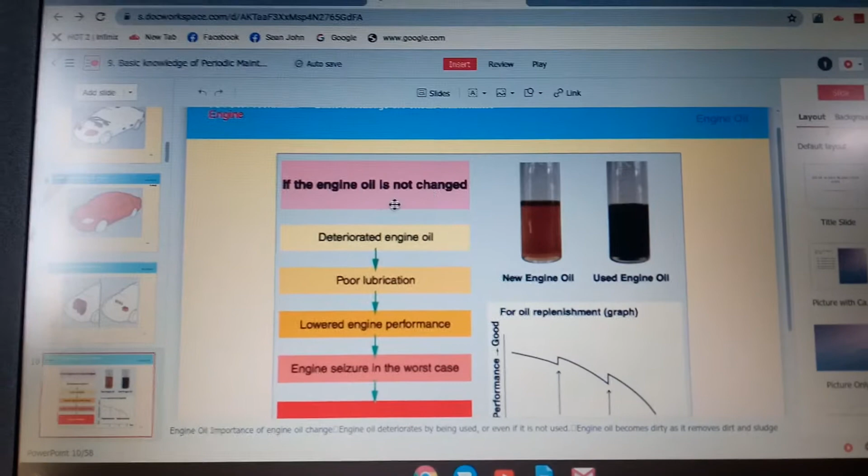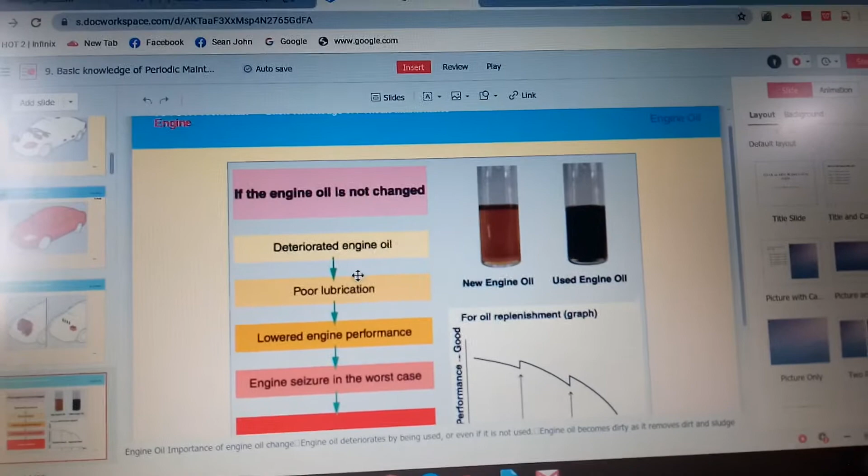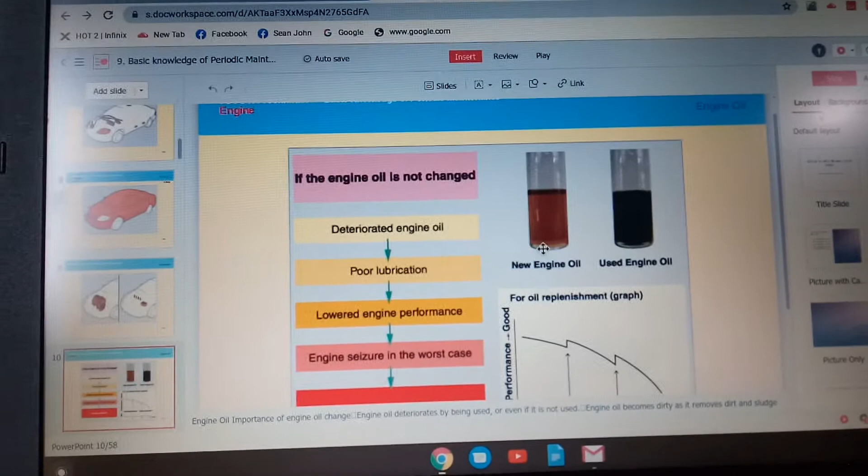This is the engine. You can see the engine oil is not changed. If the engine oil is not changed, the oil deteriorates, causing poor lubrication and lowered engine performance, and in the worst case the engine seizes, requiring new engine oil. Look at how clean new engine oil is compared to used engine oil, which is very dirty.

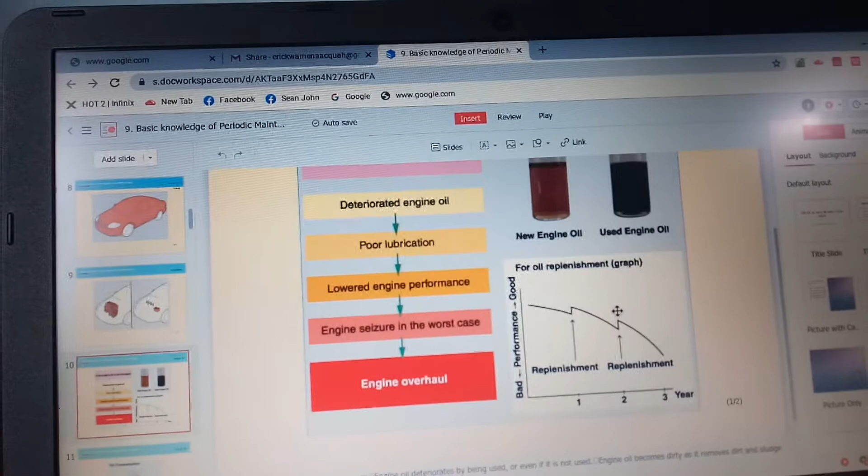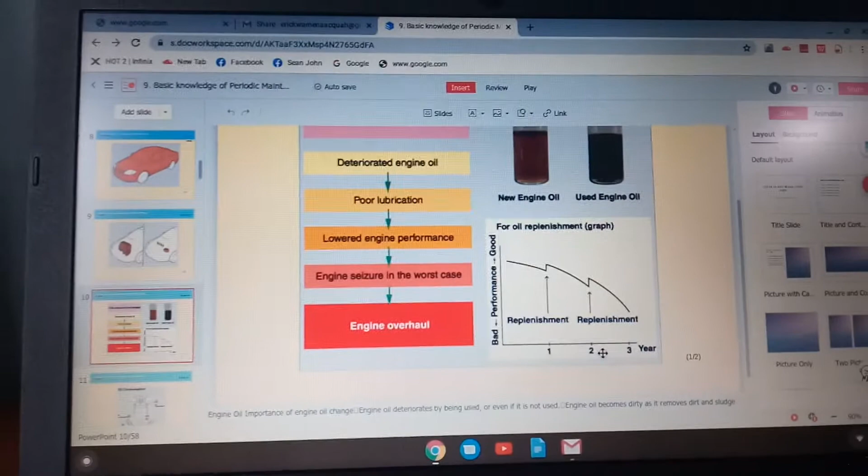For the oil replenishment graph, yes, this is the replenishment graph - engine overhaul replacement. For the oil replenishment graph, it's recommended. First year, second year, and then the third year. So there we are.

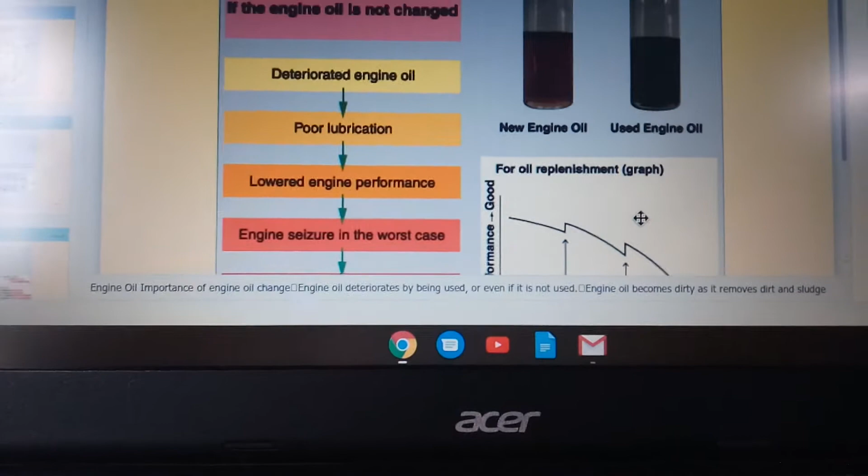Oil - the importance of engine oil. Engine oil deteriorates by use, or even if it is not used. Engine oil becomes dirty as it removes dirt and sludge.

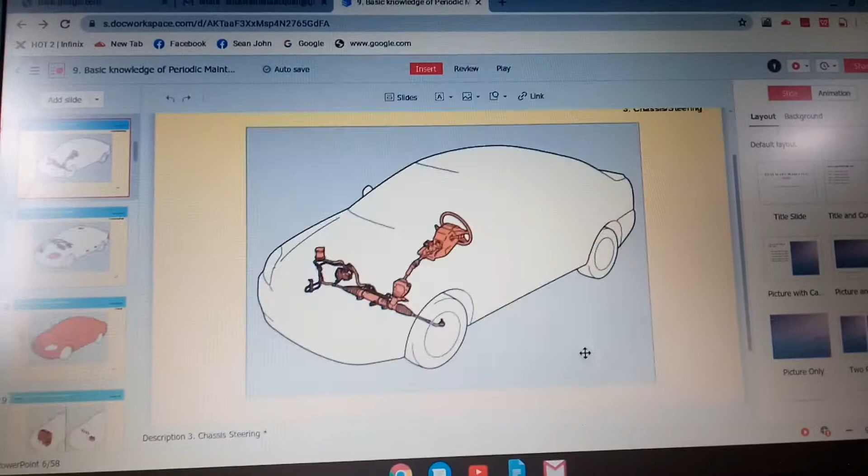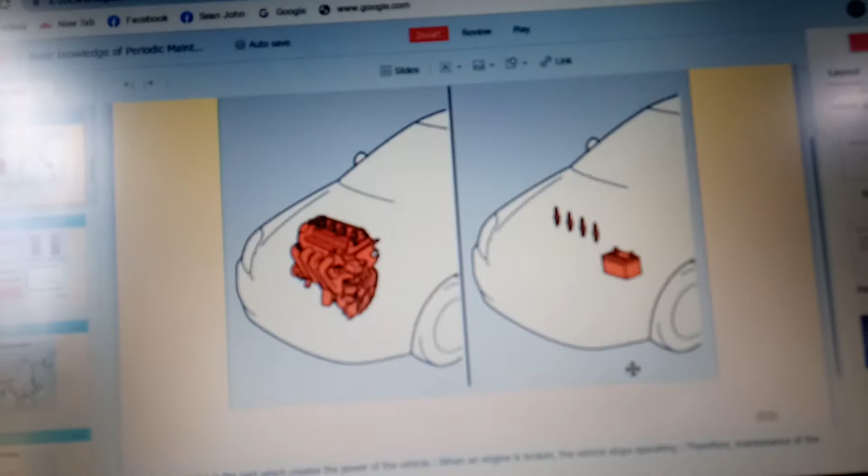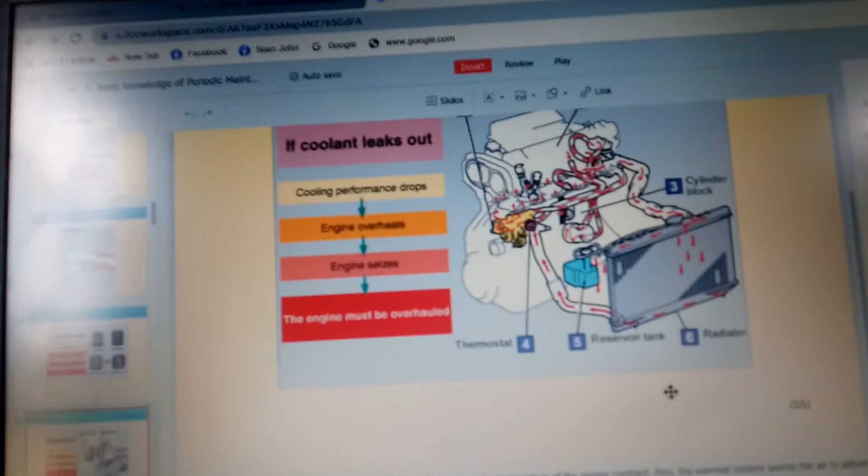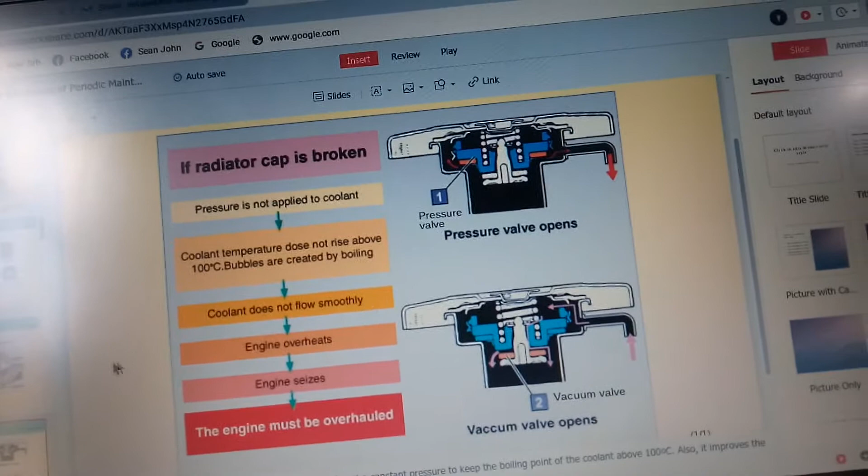Okay, the radiator cap is broken. The pressure - see, pressure is not applied to the coolant. Coolant temperature does not rise above 100 degrees Celsius. Bubbles are created by boiling. Coolant does not flow smoothly. The engine overheats and seizes. The engine must be overhauled.

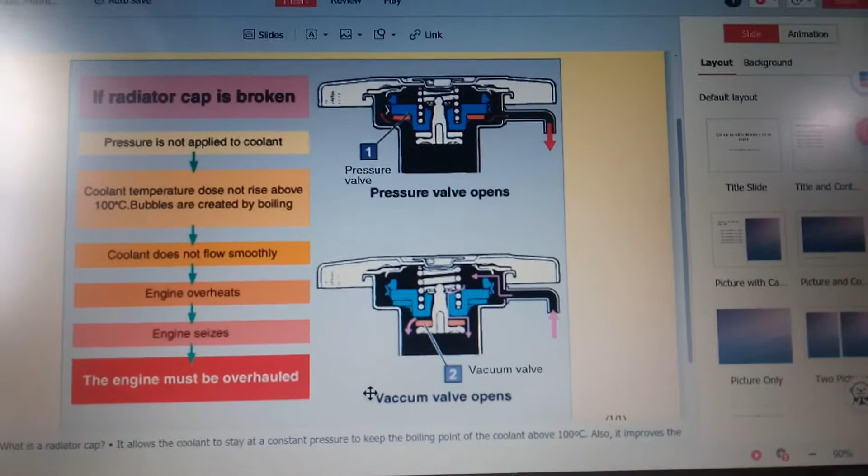The pressure valve opens, then you see the vacuum valve opens. What is a radiator cap? Radiator caps allow coolant to stay at constant pressure to keep the boiling point of the coolant above 100 degrees Celsius. Also, it improves...

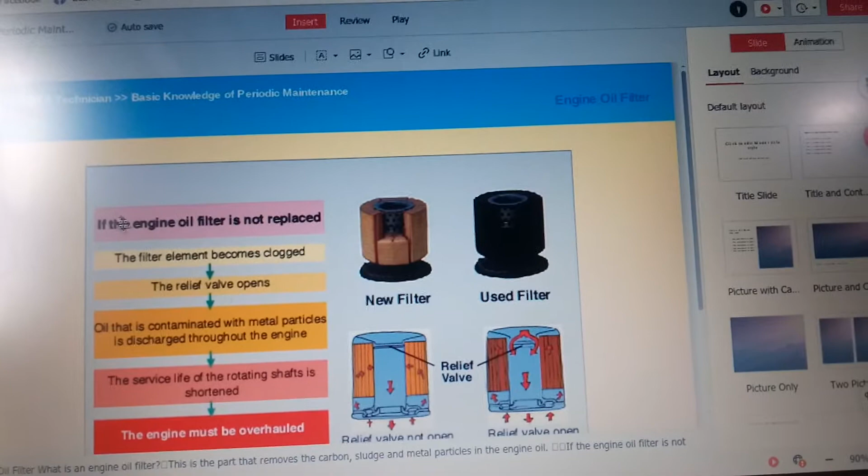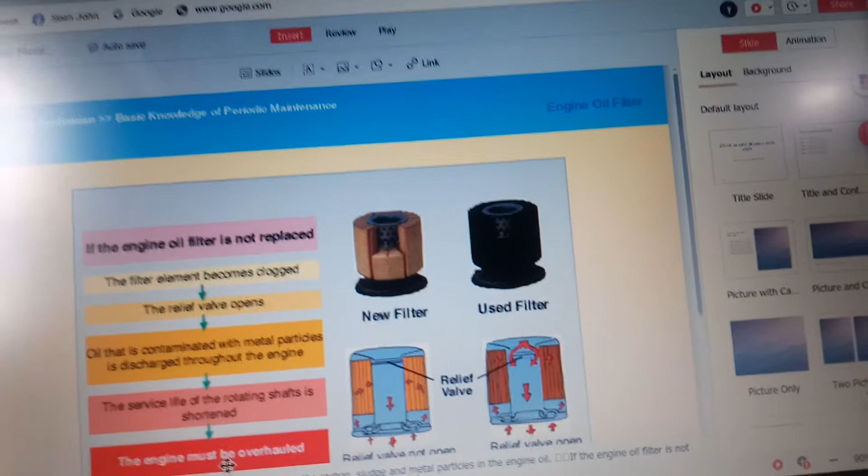Then, if the engine oil filter is not replaced, the filter element becomes clogged. The relief valve opens. Oil contaminated with metal particles is discharged throughout the engine. The service life of the rotating shaft is shortened. The engine must be overhauled. This is the new filter, and this indicates the old used filter, with its relief valve.

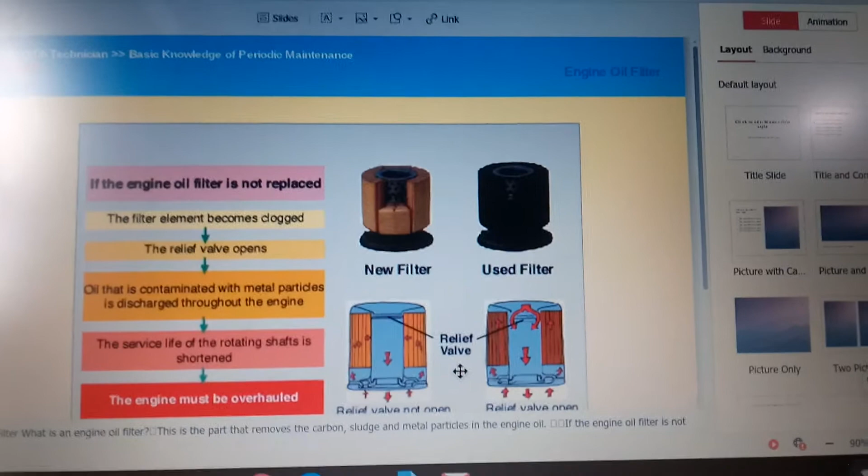So as you can see, it's all set for you. It's very educative entertainment. Let's watch it.

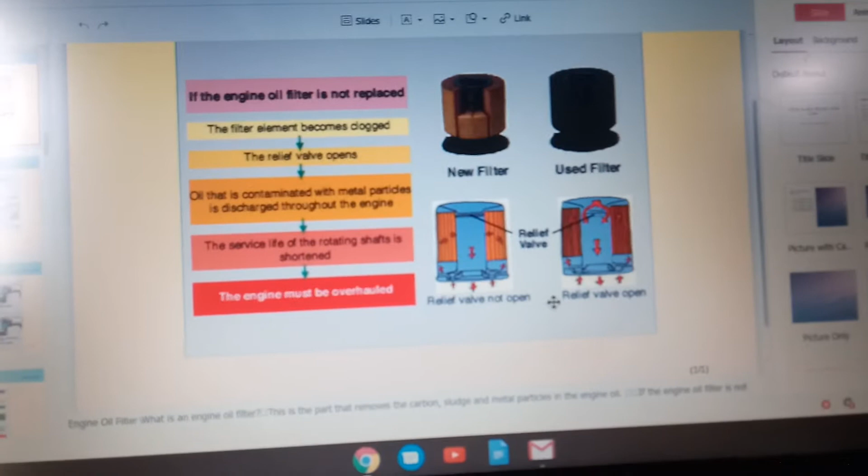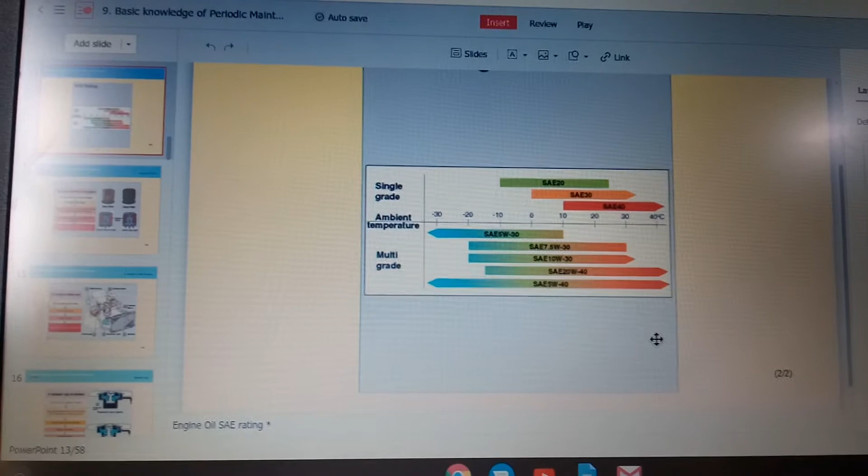And here it's talking about the rating, but let me first take you to the top and come to the rating. This is something I want to share with you. It's very important, very important, very important. My viewers, let me patiently explain this to you.

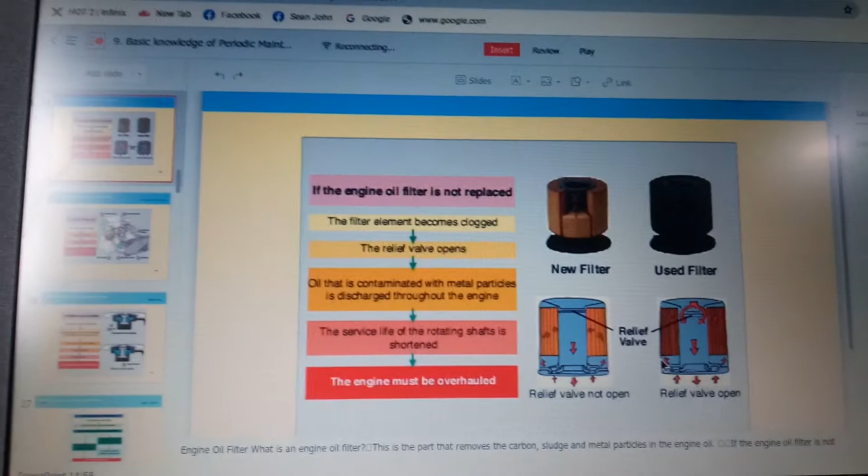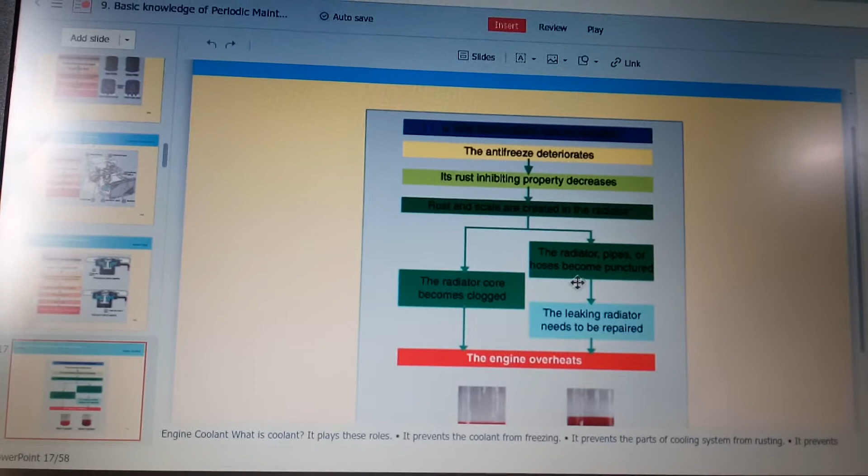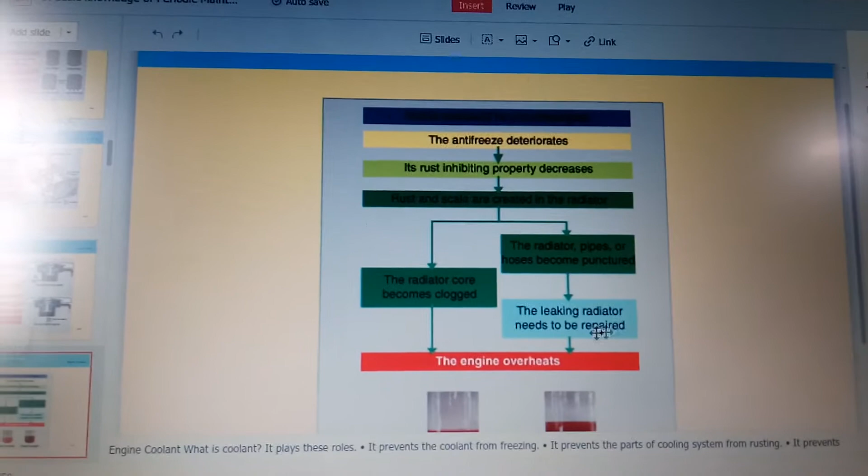From the oil filter, let me move to the antifreeze - it deteriorates, its rust inhibiting property decreases. Then you see the radiator core becomes clogged. The radiator pipes or hoses become punctured. The leaking radiator needs to be repaired. The engine overheats. Then this is what you call...

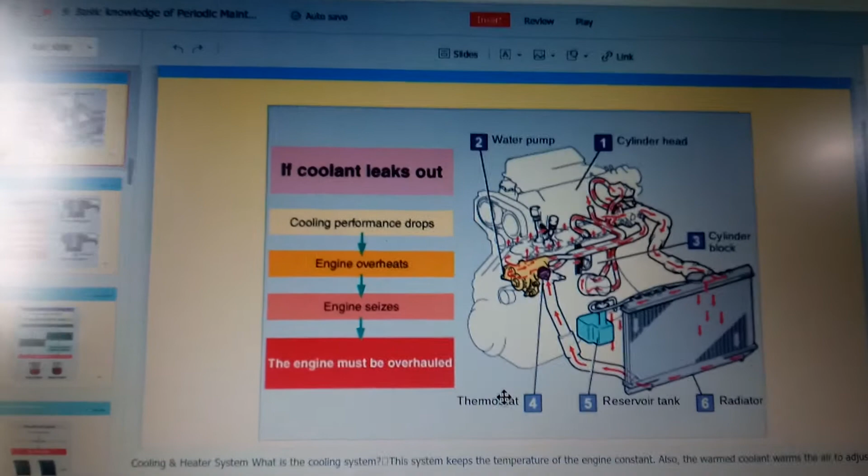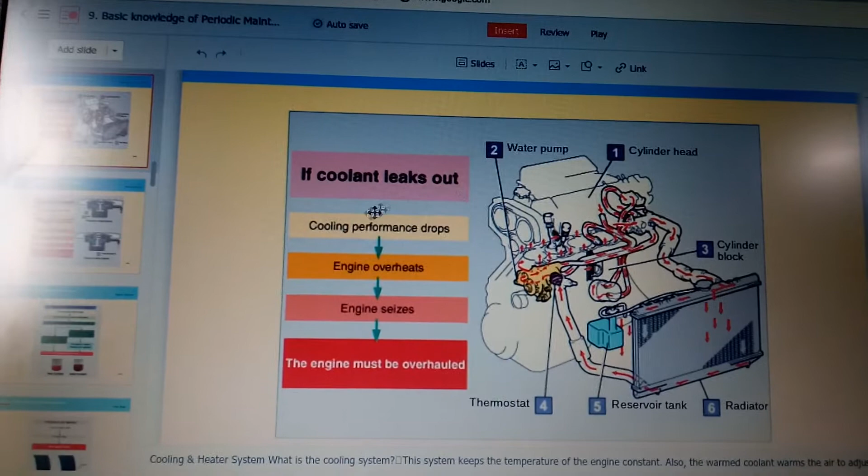Yes, this is the engine coolant system. If coolant leaks out, cooling performance drops, the engine overheats, the engine seizes, and the engine must be overhauled.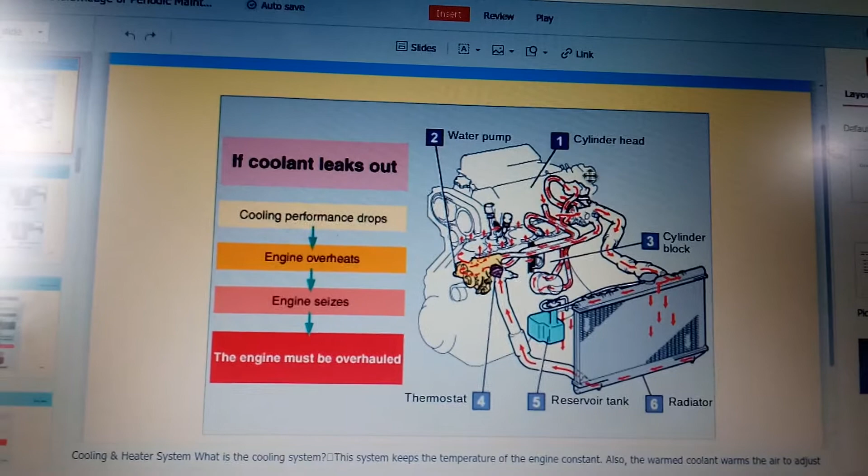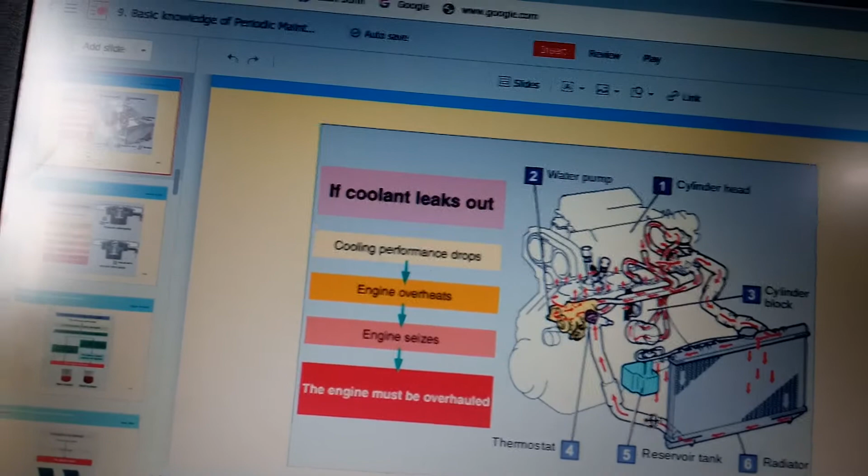And basically this is the system below. Water pump all the way from the front. On top there's a cylinder head, and when you come down here, that's the cylinder block - the engine block. Then we have the thermostat, the water thermostat. This is the reservoir tank connected here. Then the radiator - this is the radiator.

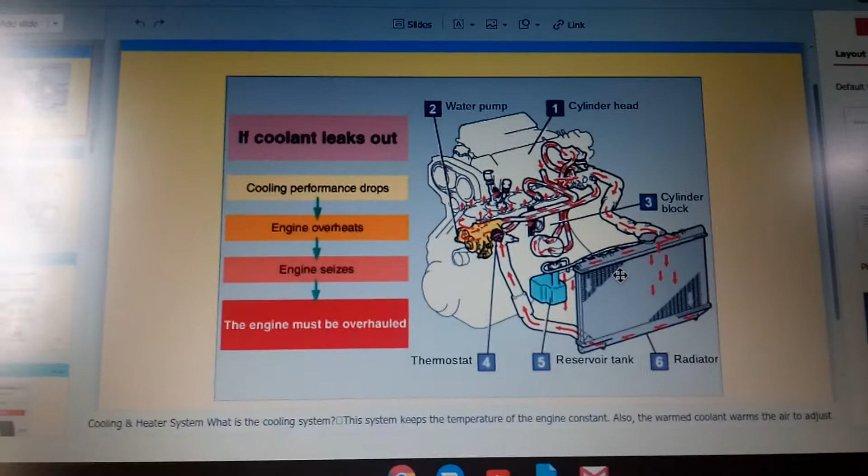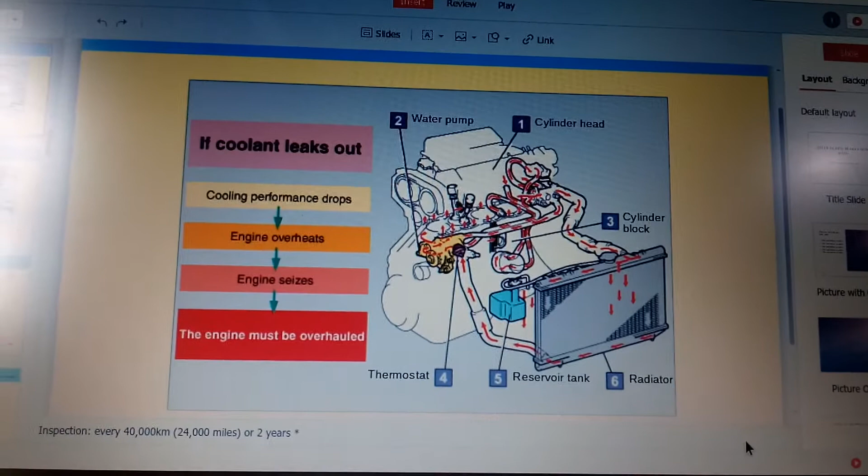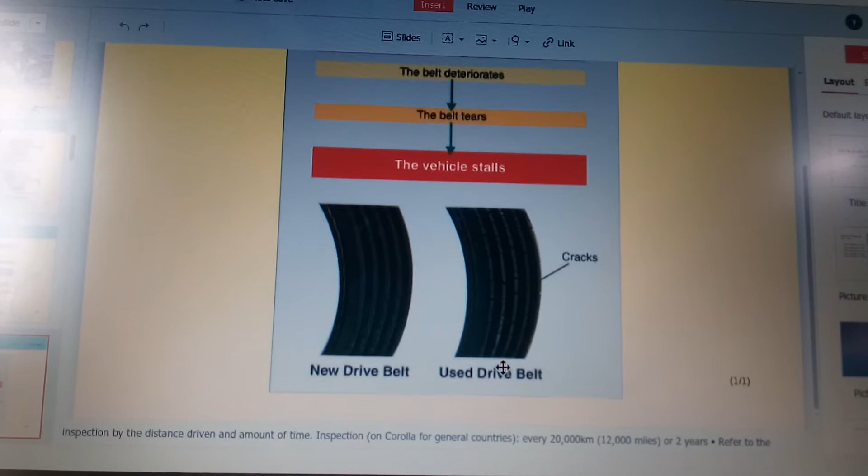So it's very simple and very entertaining. What is the cooling and heater system? This system keeps the temperature of the engine constant. The warm coolant warms the air to adjust. It's very simple - now you know about the cooling system, and how it works. So from here you're going to drive to the antifreeze system.

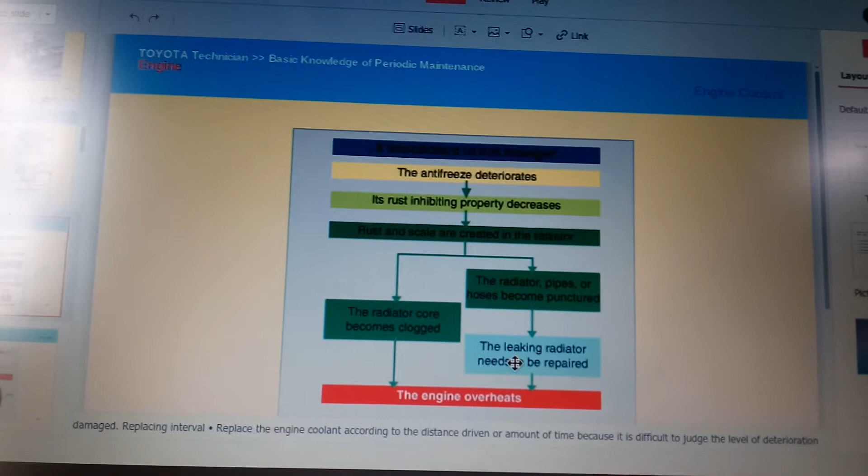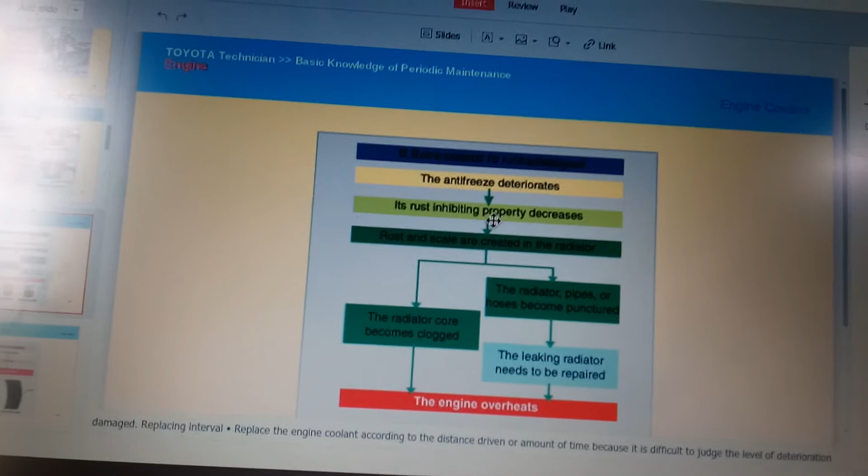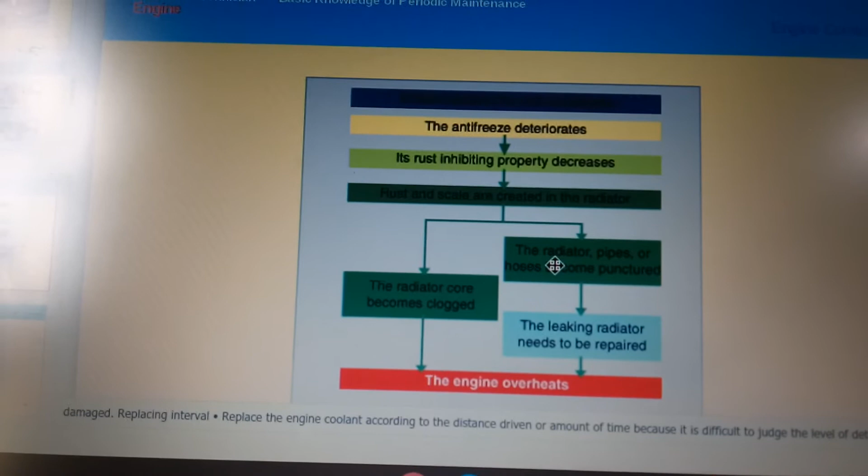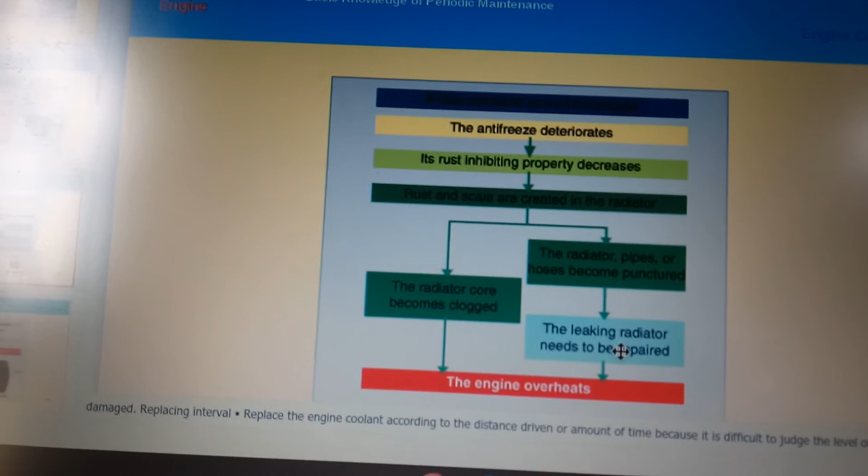So we are still on periodic maintenance, basic knowledge of periodic maintenance. And here you can see the antifreeze deteriorates, its rust inhibiting property decreases. So here, rust and scale are created in the radiator. It's quite interesting - the radiator core becomes clogged, and the radiator pipes or hoses become punctured. Here it indicates that the leaking radiator needs to be repaired. Engine overheats means if you don't maintain it well, you might end up buying a new engine.

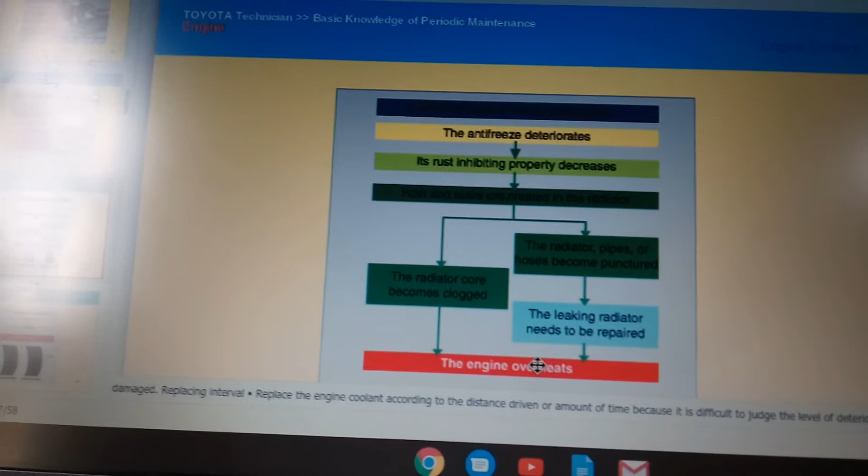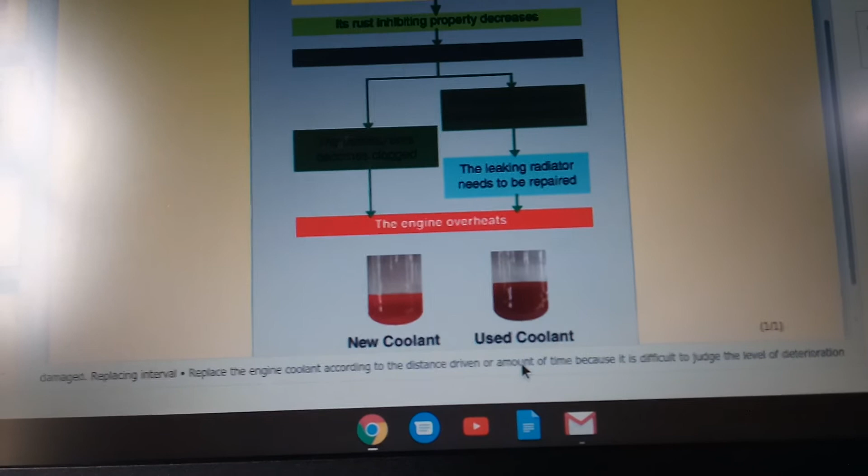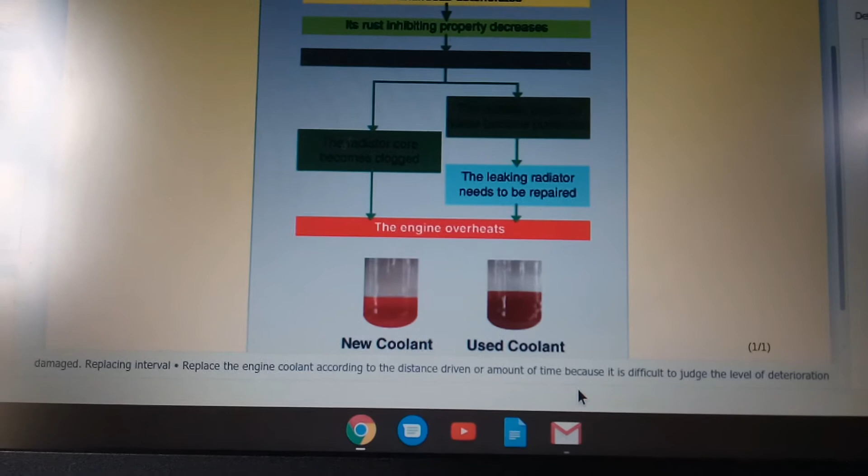And see the leaking radiator. When the engine overheats, compare new coolant and old coolant. New coolant must also eventually deteriorate. Replace engine coolant according to distance driven or amount of time, because it is difficult to judge the level of deterioration by looking. Yes, it's very difficult to judge the level just by looking.

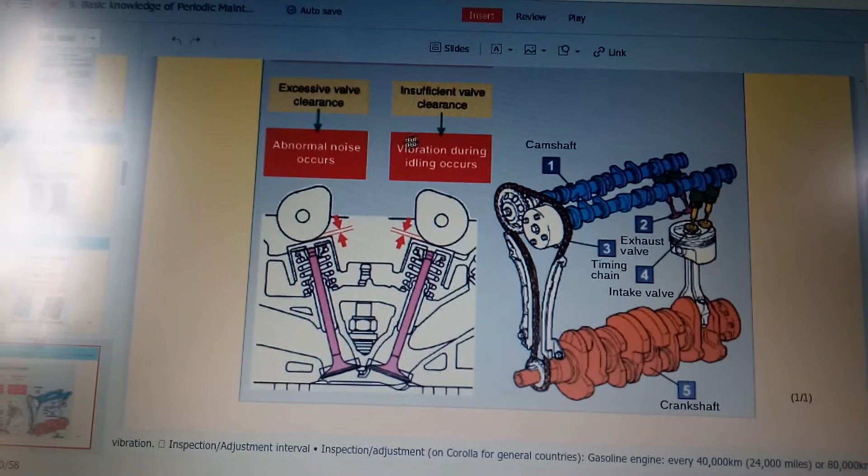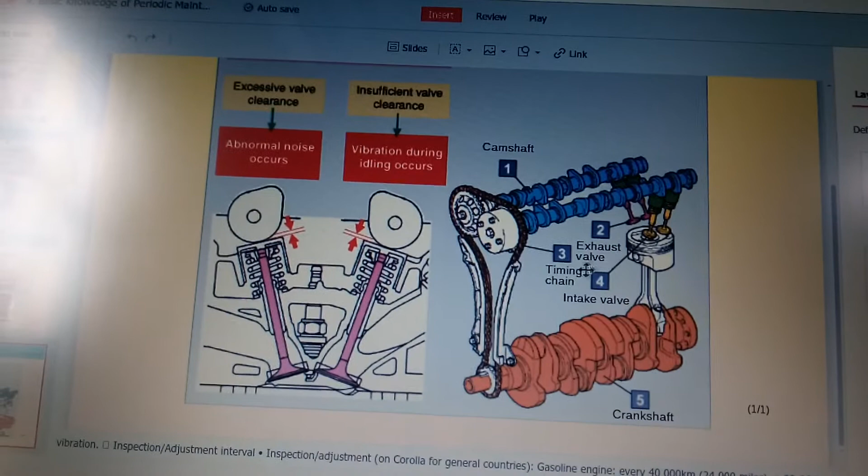So there we are. This figure indicates excessive valve clearance, insufficient valve clearance. Abnormal noise occurs when the engine becomes abnormal - you don't get good sound from the vehicle engine, and vibration during idling occurs. This is the camshaft, the main component of the engine: camshaft, exhaust valve, timing chain, intake valve, then the crankshaft.

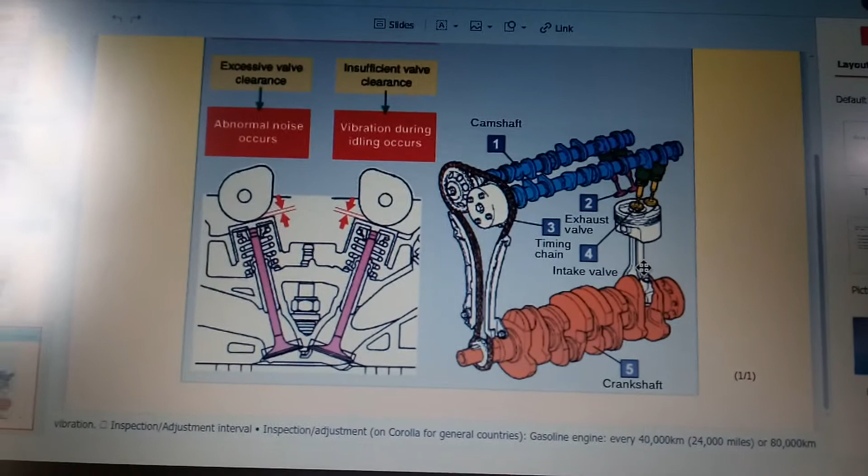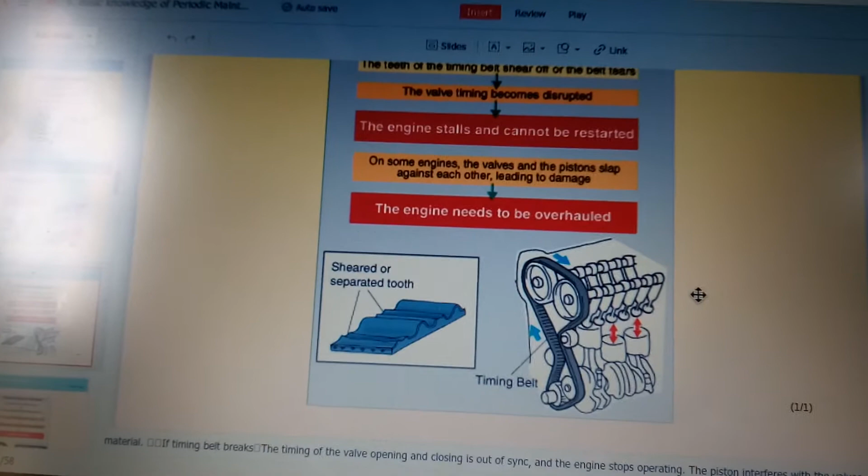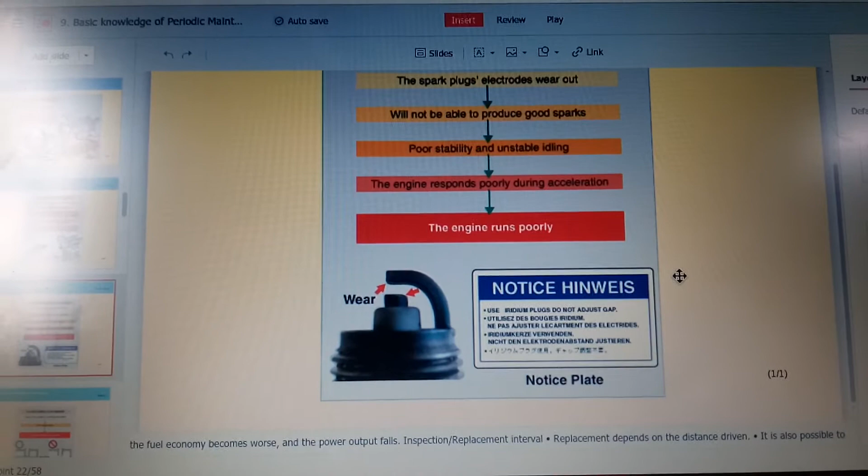Fuel economy becomes worse and power output fails. For the inspection and replacement interval, replace depending on the distance driven. It is also possible to control blow-by gas and burn it.

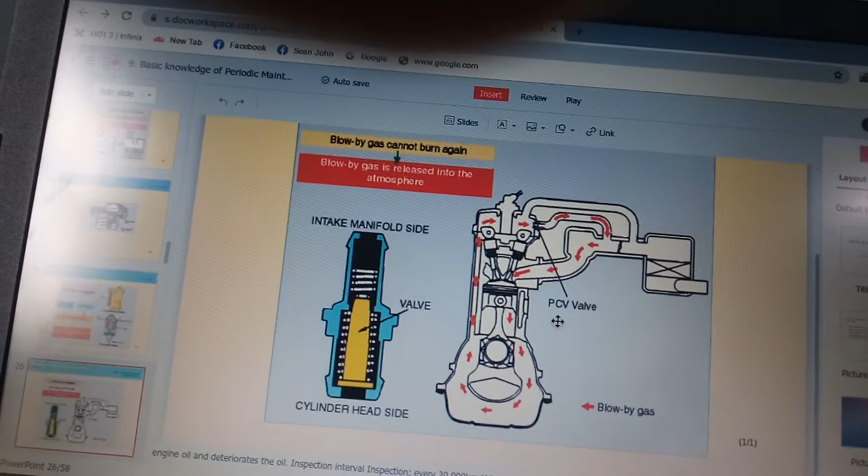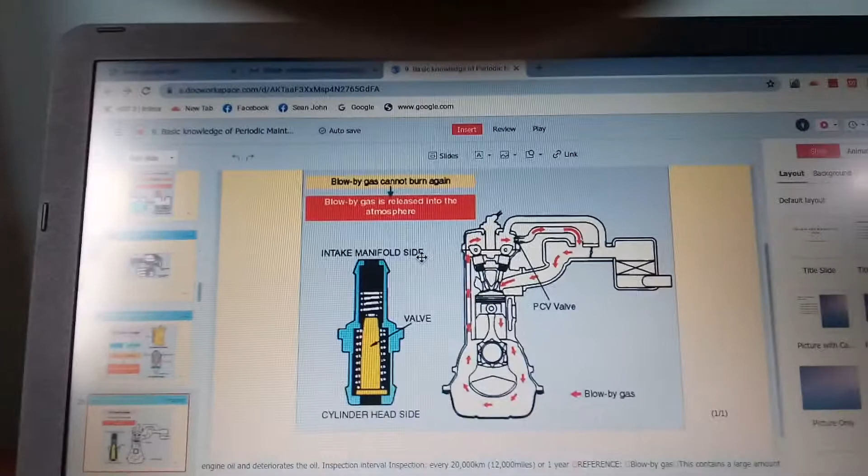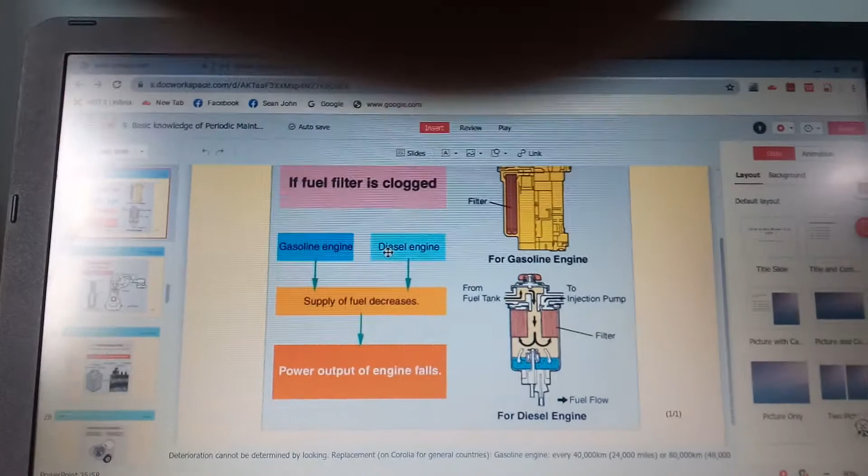So the PCV valve controls blow-by gas on the cylinder head side. This valve is on the intake manifold side. There you go - there we go, a lot of things. You can see the fuel filter is clogged. Just want you to take a good look at it.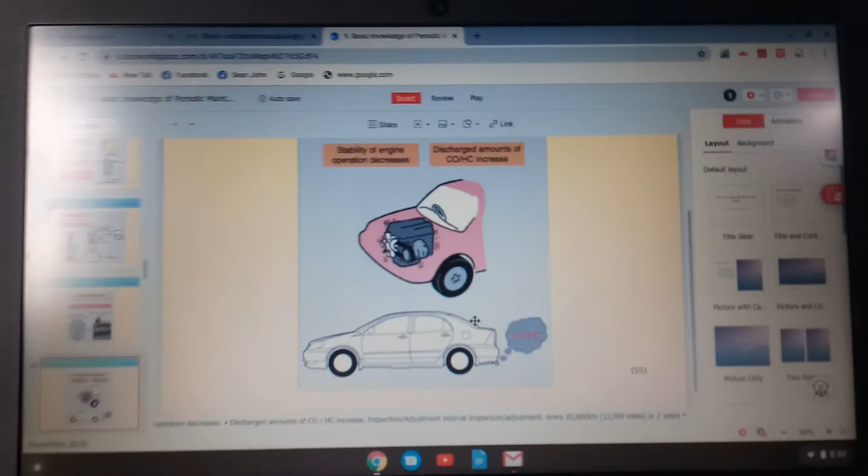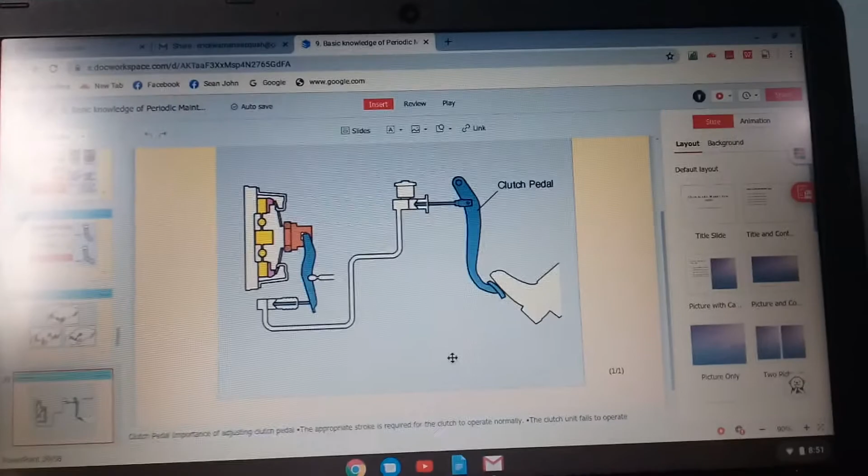A lot of things, very entertaining. Welcome. This is the clutch pedal, shown with the diagram below.

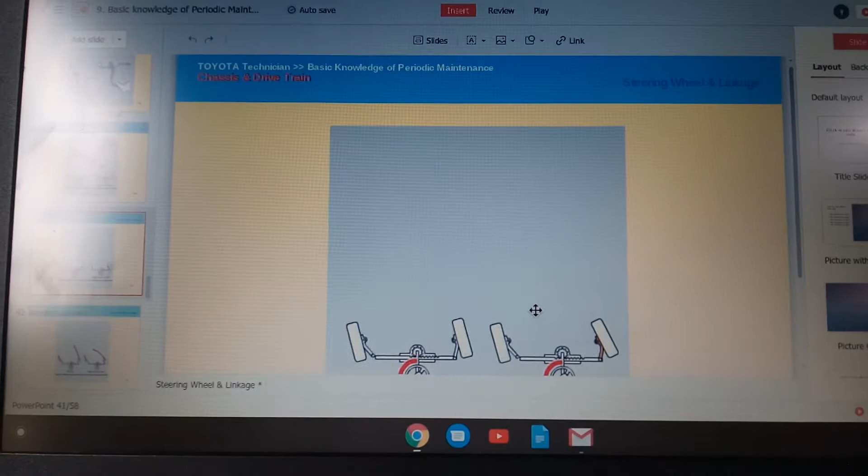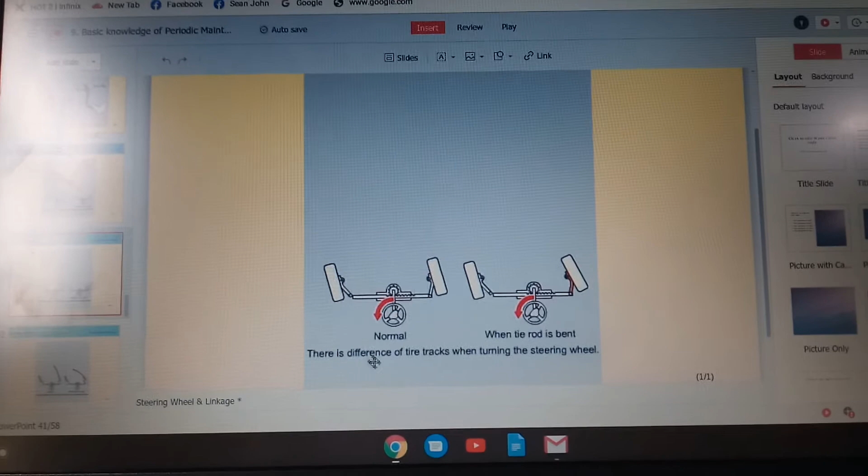And here we have the chassis, the drivetrain, the steering wheel and linkage. Steering wheel and linkage, normal - there is a difference in tire track when turning the steering wheel. Here, when the tie rod is bent, this is the normal steering wheel compared to the bending steering tire wheel. It also indicates the transmission.